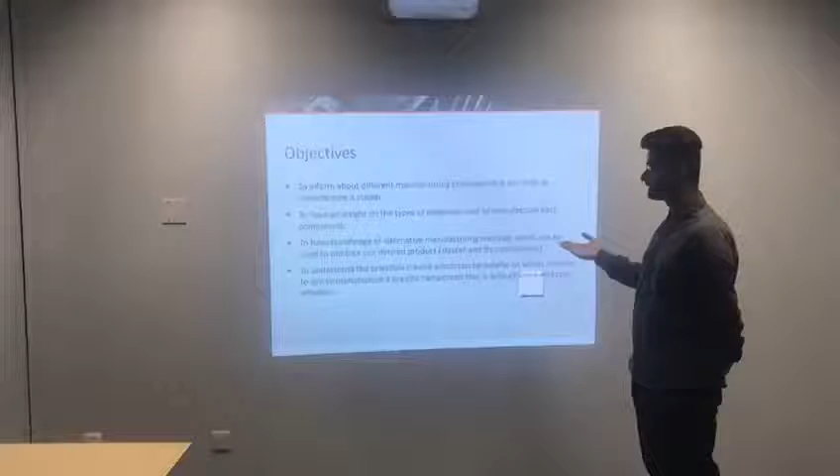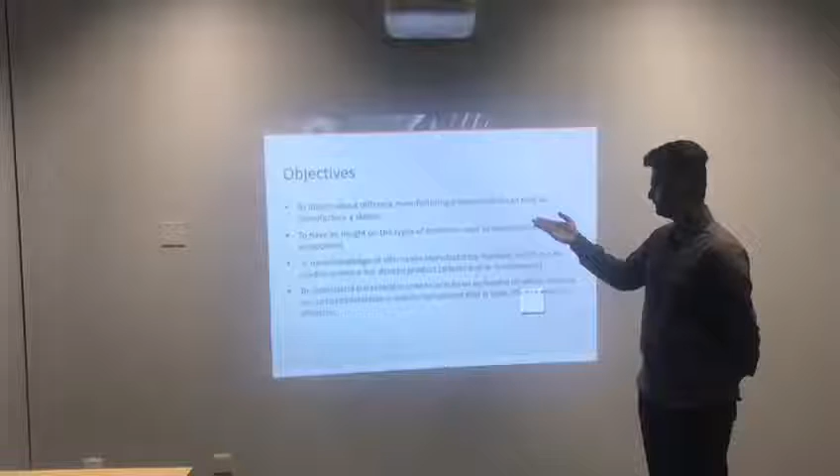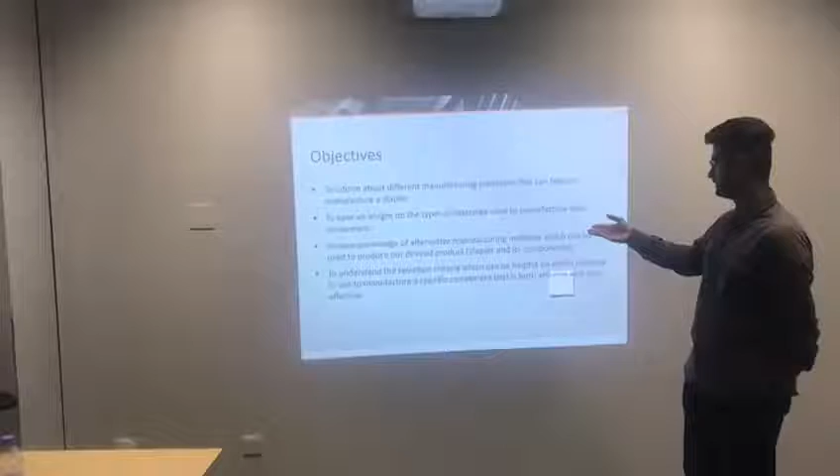The next slide is about objectives. Here we are here to inform about the different manufacturing processes that can help us manufacture a stapler. The second one is to have an insight of the types of material used to manufacture each component. The third one is to have knowledge of the alternative manufacturing processes, since the one which we are explaining is not the only one; there are different methods. The last one is to understand the selection criteria, which can be helpful on which material to use to manufacture a specific component that should be both efficient and cost effective.

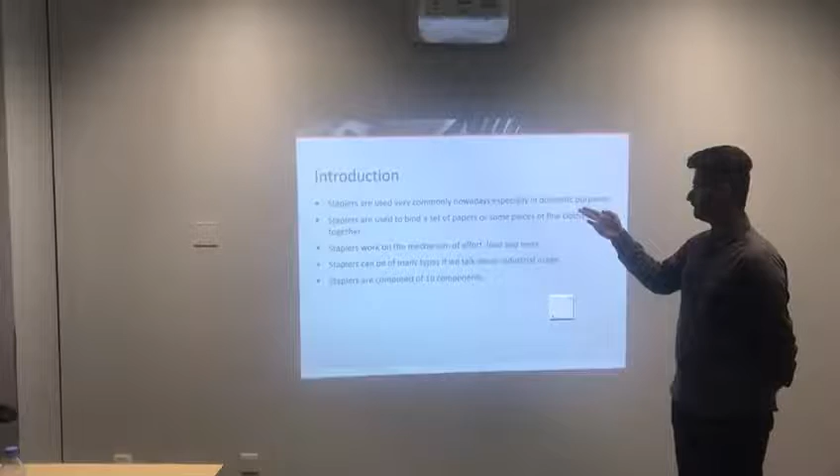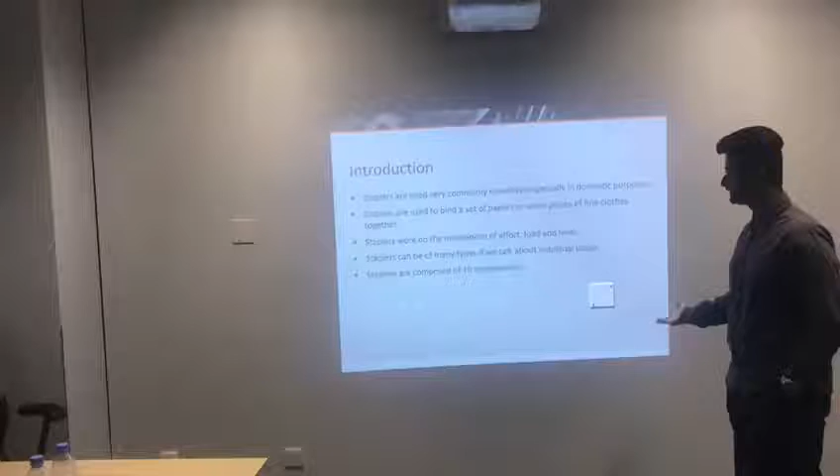In introduction, we all know that staplers are very commonly used nowadays, especially in domestic purposes. We have staplers which are used to bind a set of papers and some fine pieces of clothes together. Staplers work on the mechanism of effort, load, and lever: you have your base and the top part where you exert force, and the lower part on the edge of the base is where the load is given, with a fulcrum, like a pin on the end of the stapler. These staplers can be of many types; we can talk about it from the industrial usage also. The staplers are composed of 10 components, which my group mates will further continue and talk about.

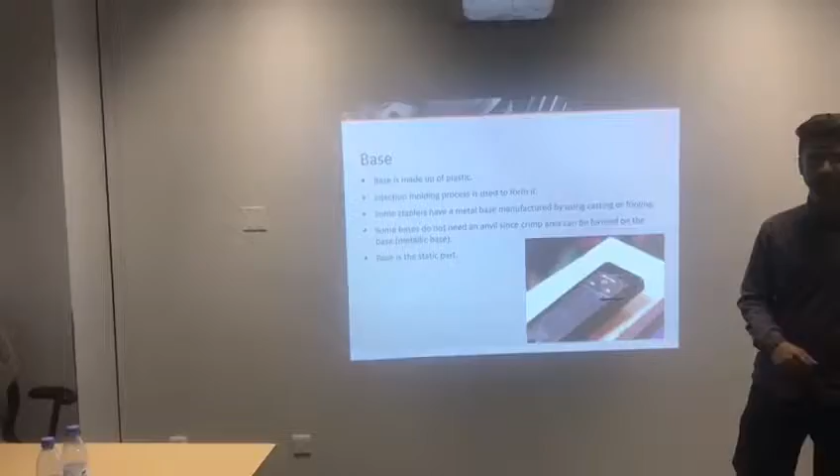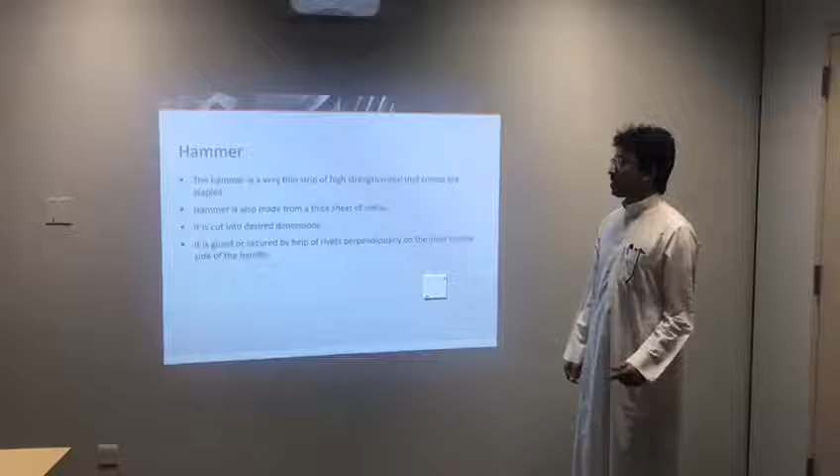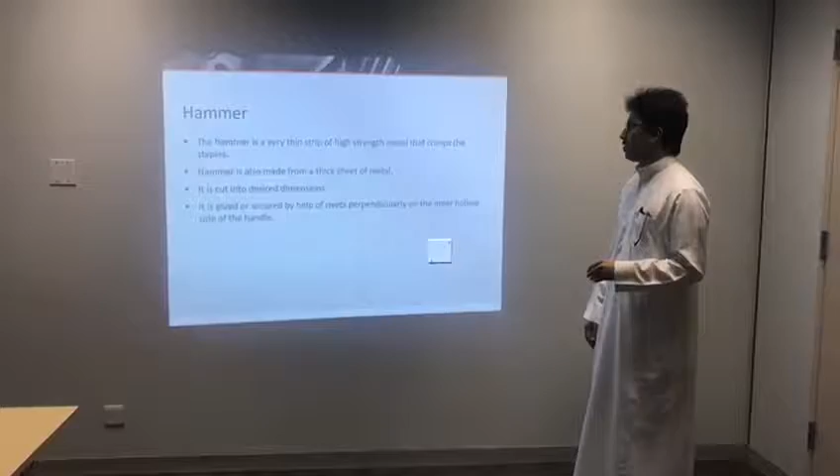Hello everyone, my name is Abdul Karim Al-Harbi. Hammer is a very thin strip of high strength metal that crimps the staples. Hammer is also made from a thick sheet of metal. It is cut into desired dimensions, and also glued or secured by help of rivets perpendicularly on the inner hollow side of the handle.

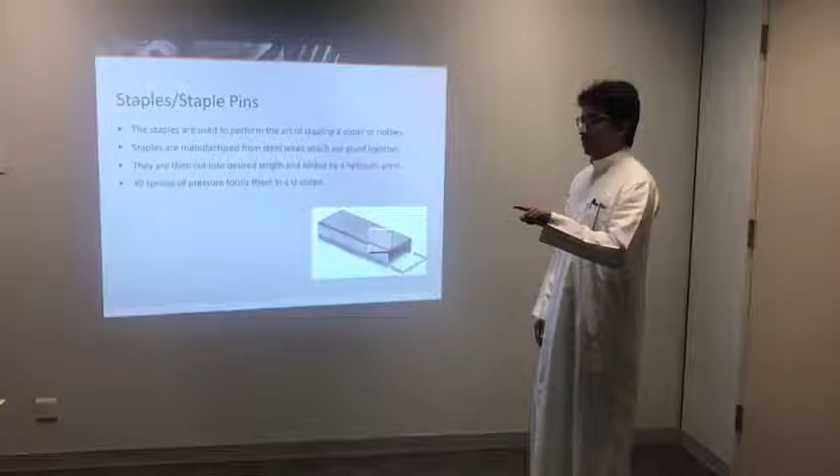The pusher is a small U-shaped part, slightly less thick than the thickness of the carrier raceway. It is used to push the stack of staples and keep them constrained to the crimping end of the staple. It is also made up of high-strength sheet metal or steel. It has a hook on one end to support the spring, and one end is flat to sit completely interfered with the staples.

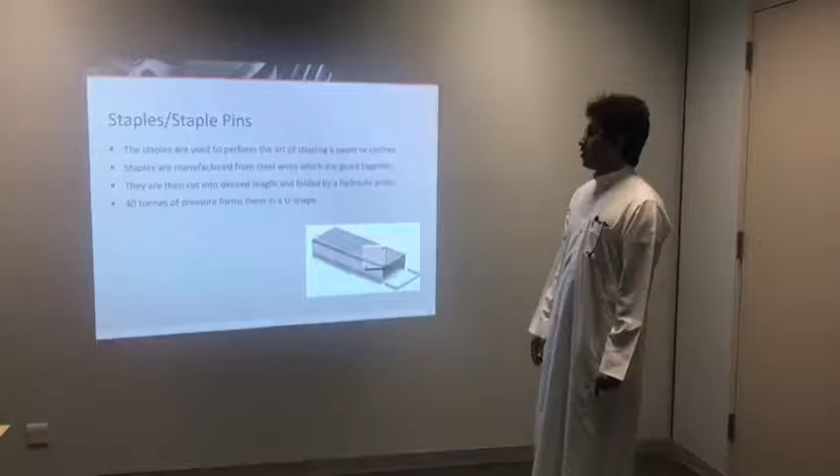Staples, or staple pins, are used to perform the art of stapling paper or clothes. Staples are manufactured from steel wires which are glued together. They are cut into desired length and folded by hydraulic press; 40 tons of pressure forms them in a U shape.

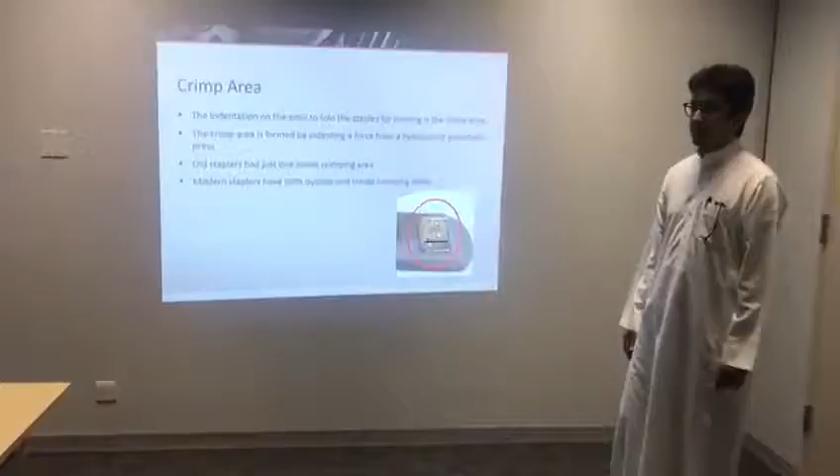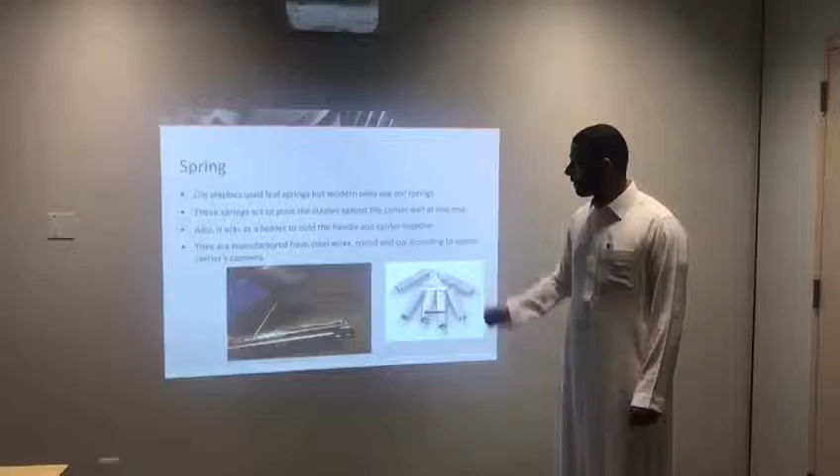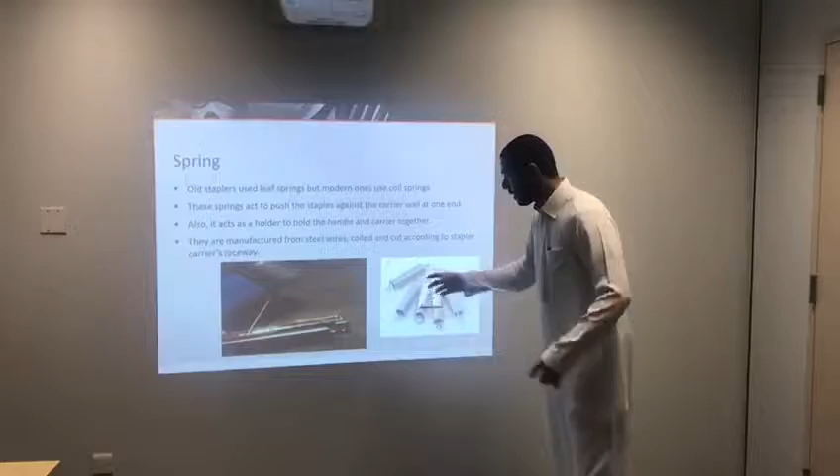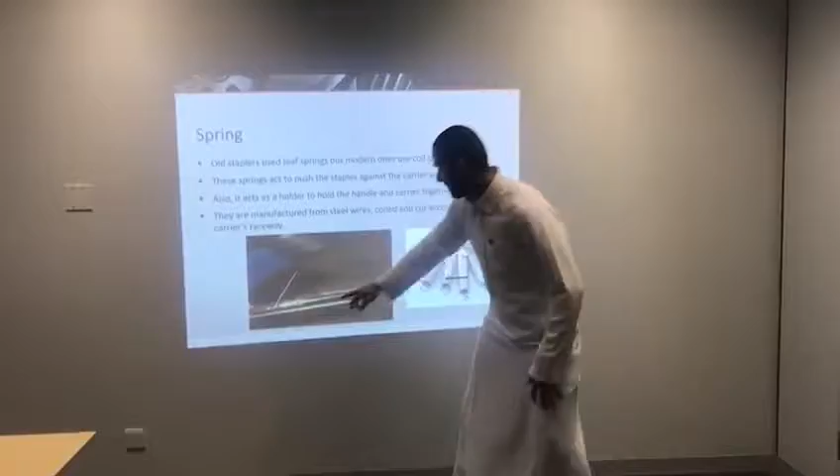Hello everyone, my name is Mohammed Al-Ruktan. I will talk about spring. Old staplers used leaf springs, but modern ones use coil springs, which is different. As you could see here, it could push the small anvil. What is this part? This here, where you go, this is pushing the pins, right? Okay, let's do it again.

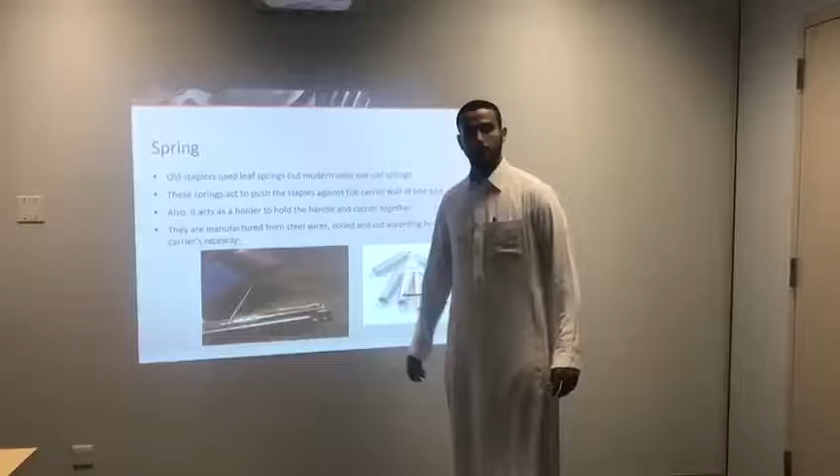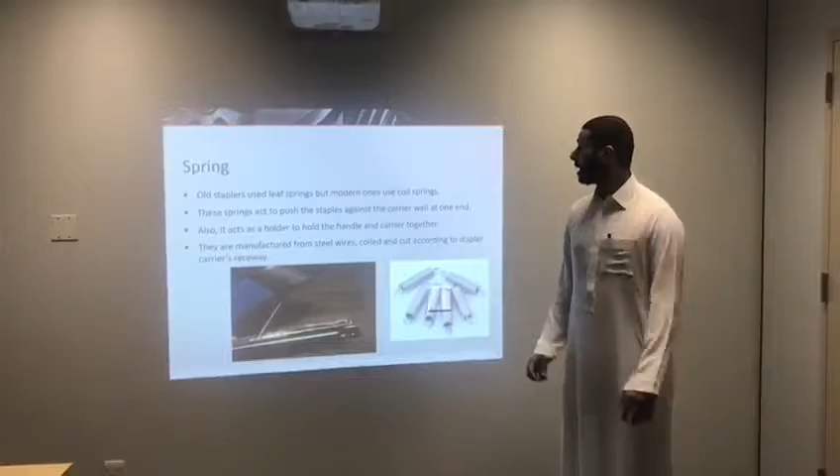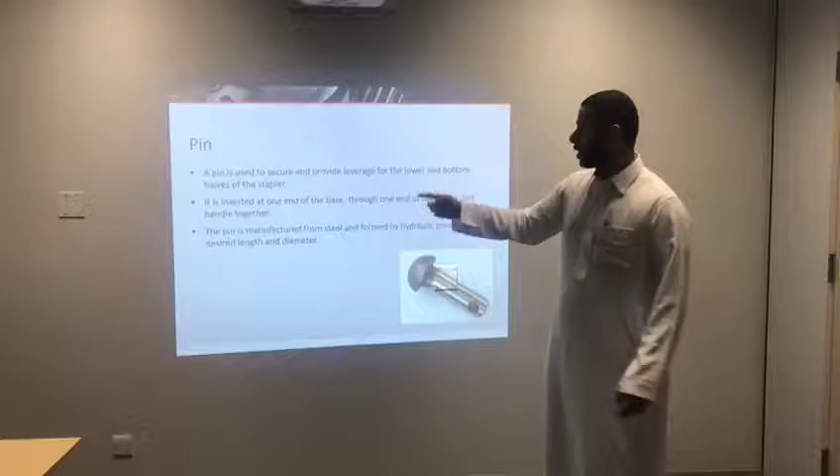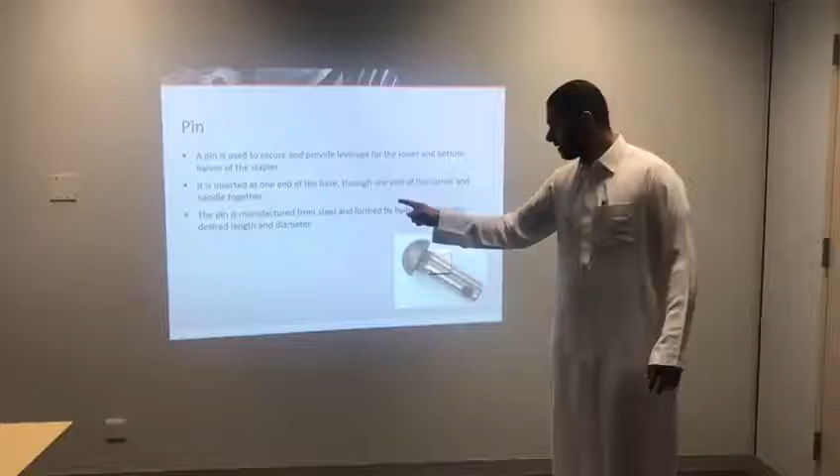Hello everyone, my name is Mohammed Al-Ruktan. Today I will talk about spring. Old staplers use leaf springs, but modern ones use coil springs. As you see here, these are the springs, pushing the pins here. These springs act to push the staples against the carrier wall at one end. Also, it acts as a holder to hold the handle and carrier together. They are manufactured from steel wires, coiled according to the stapler carrier's raceway. A pin is used to secure and provide leverage from the upper and bottom halves of the stapler. It is inserted at one end of the base through one end of the carrier and handle together. The pin is manufactured from steel and formed by hydraulic press into desired length and diameter.

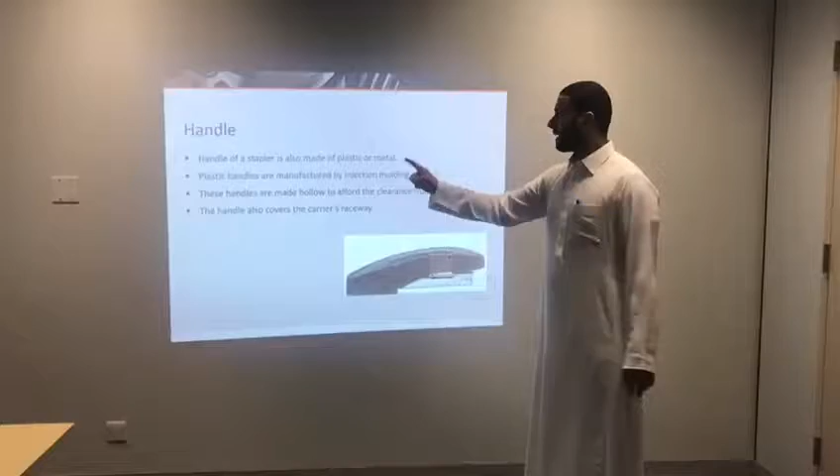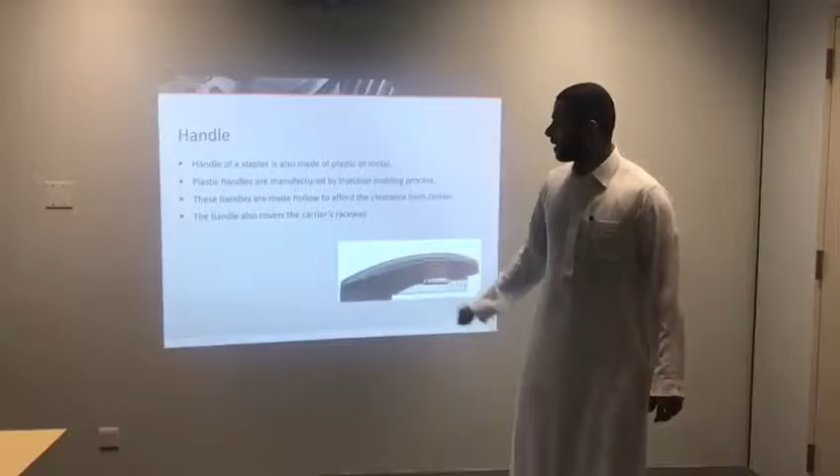Handle of a stapler is also made of plastic or metal. Plastic handles are manufactured by injection molding process. These handles are made hollow to afford clearance from the carrier. The handle also covers the carrier's raceway.

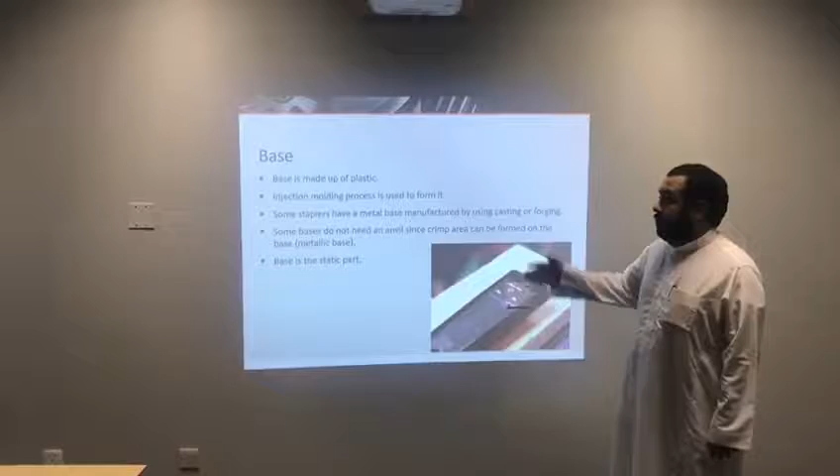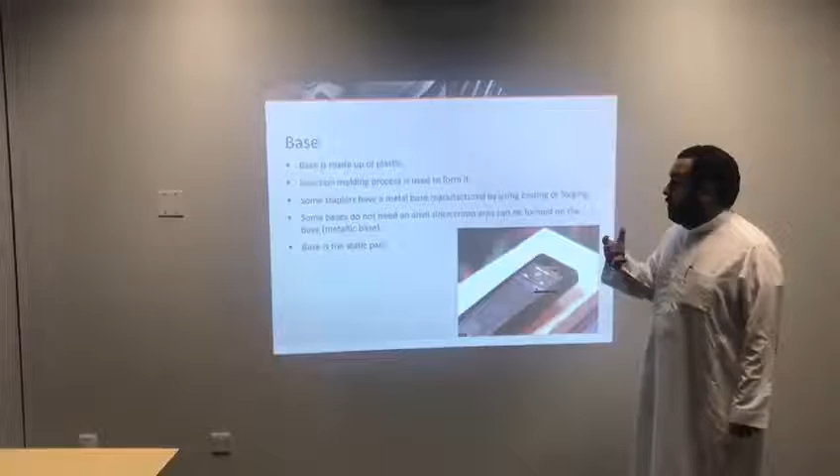Hi everyone, my name is Turki Ahmeri. I will talk about base. Base is made up of plastic. Injection molding process is used to form it. Some staplers have a metal base manufactured by using casting or forging. Some bases do not need an anvil, since the crimp area can be formed on the base. Base is the static part, like here; this part is the static one.

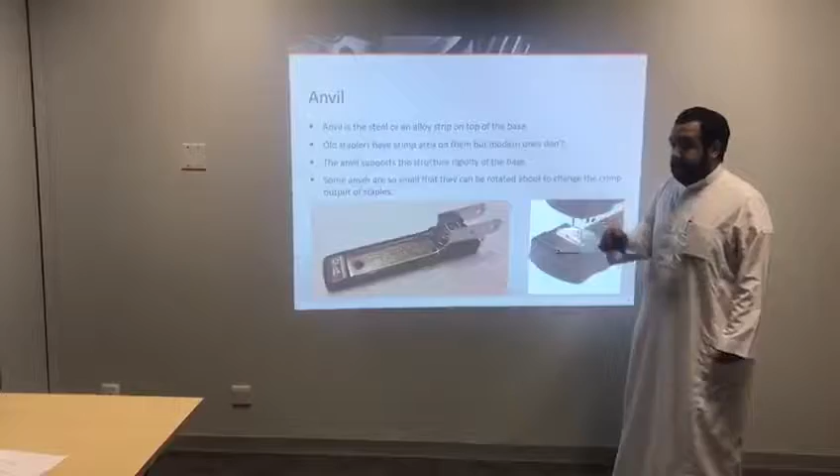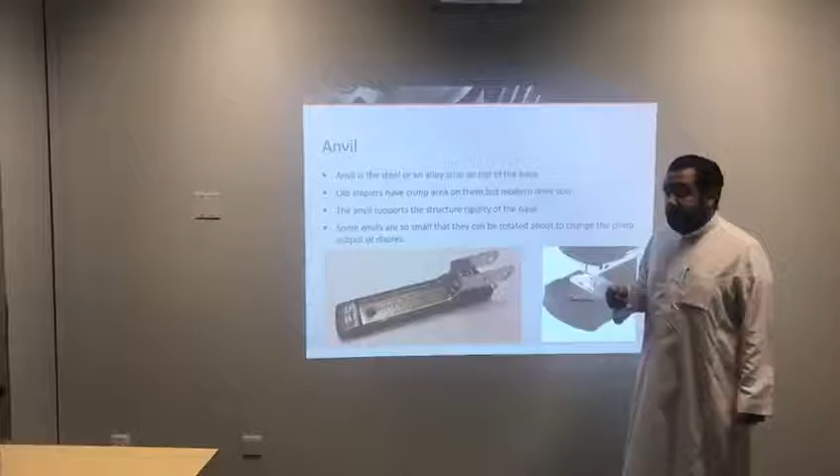Here is the anvil. Anvil is the steel or alloy strip on top of the base. Old staplers like this one have a crimp area on them, but modern ones don't. The anvil supports the structural rigidity of the base. Some anvils are so small that they can be rotated to change the crimp output of the staples.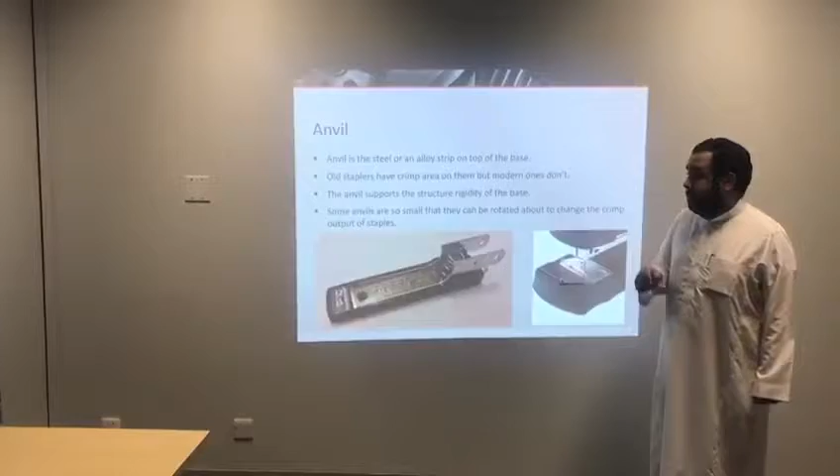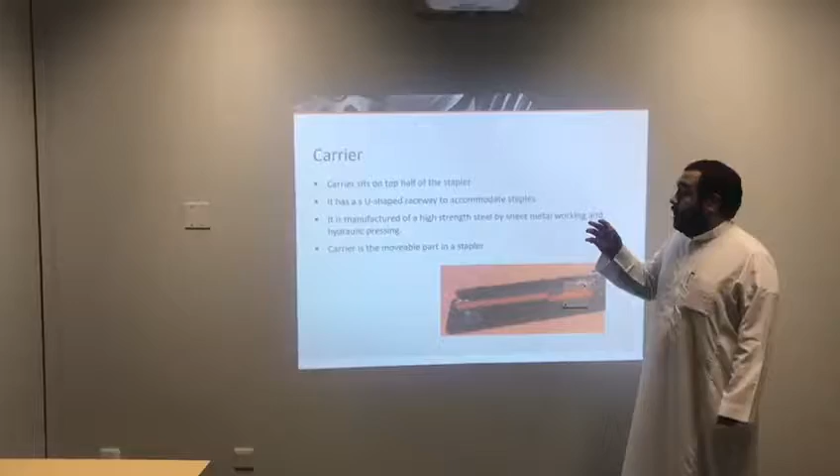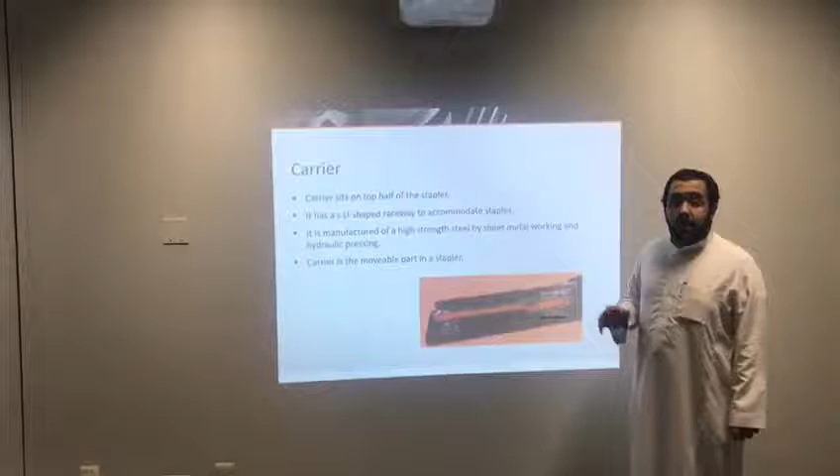Carrier sits on top half of the stapler. It has a U-shaped raceway to accommodate staples. It is manufactured from high strength steel by sheet metal working and hydraulic pressing. Carrier is the movable part in a stapler, like this part here, where the bin can be put inside.

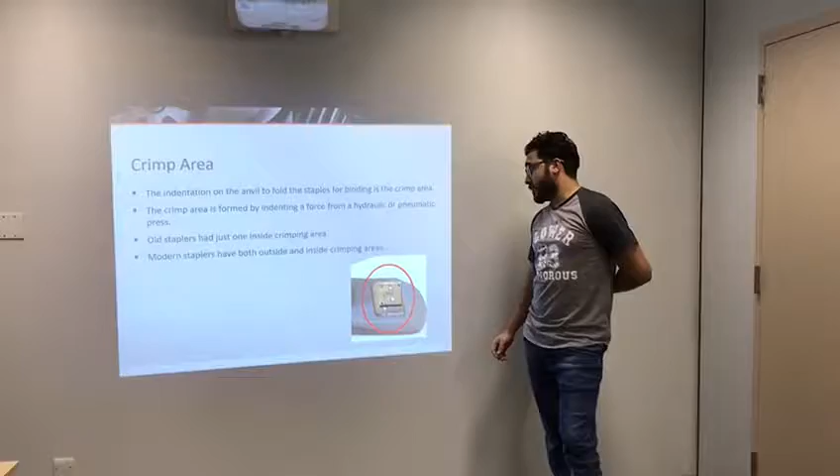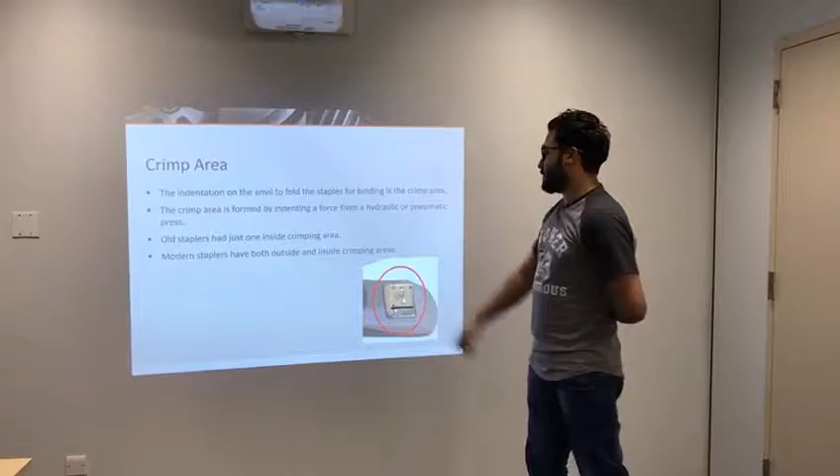Moving on to crimp area: the indentation on the anvil to fold the staples for binding is the crimp area. The crimp area is formed by indenting a force from a hydraulic or pneumatic press. Old staplers had just one inside crimp area. Modern staplers have both outside and inside crimp areas, like this one and this one.

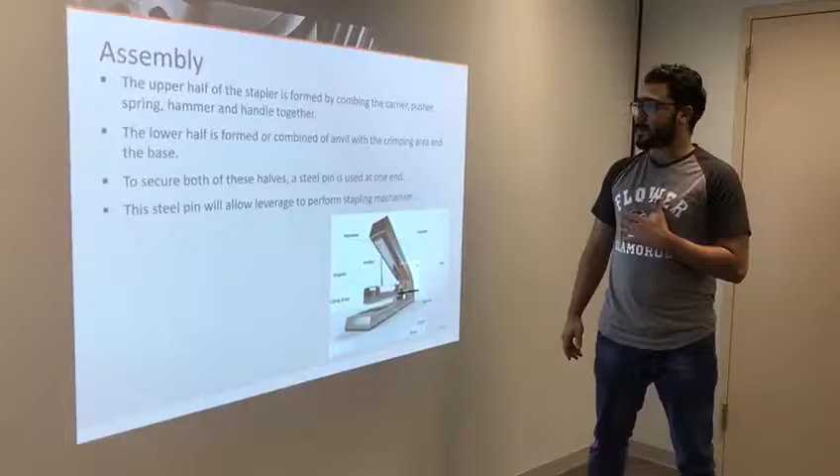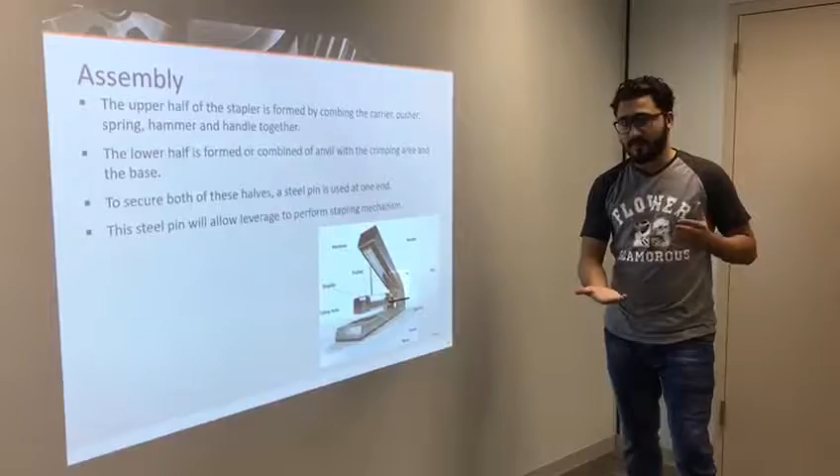Moving on to assembly: the upper half of the stapler is formed by combining the carrier, the pusher, spring, hammer, and handle together. The lower half is formed by combining the anvil with crimping area and the base. To secure both of these halves, a steel pin is used at one end, which allows leverage to perform the stapling mechanism.

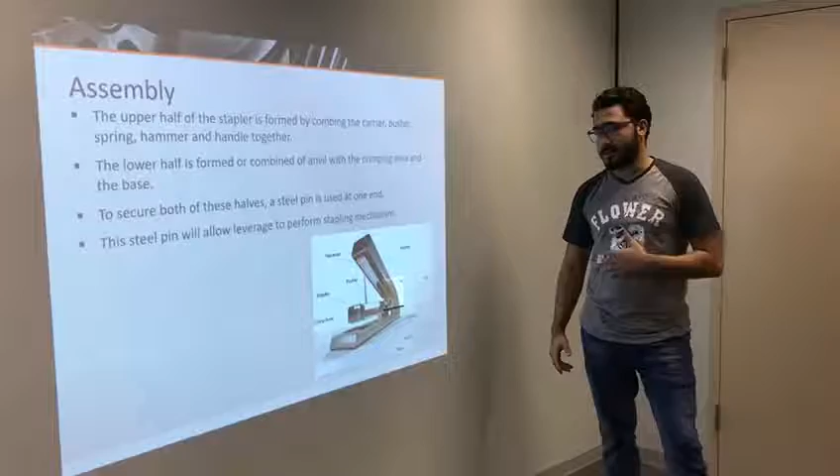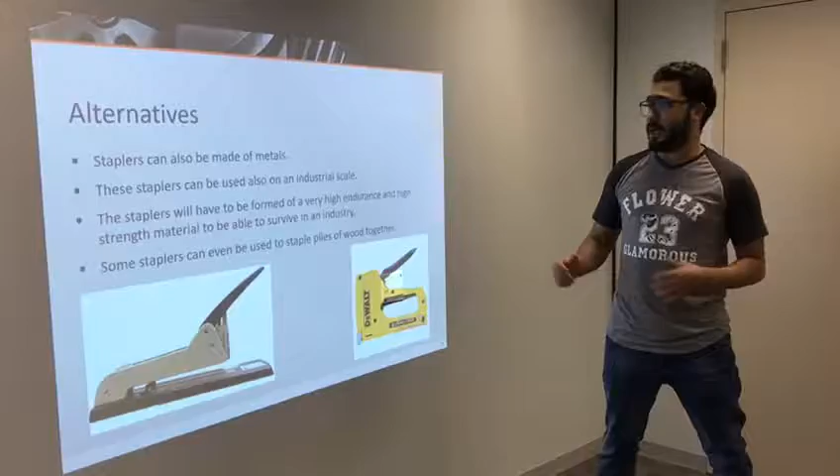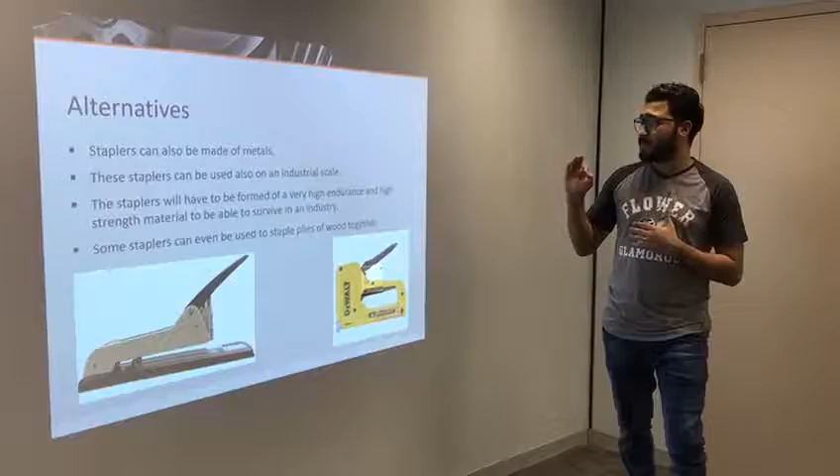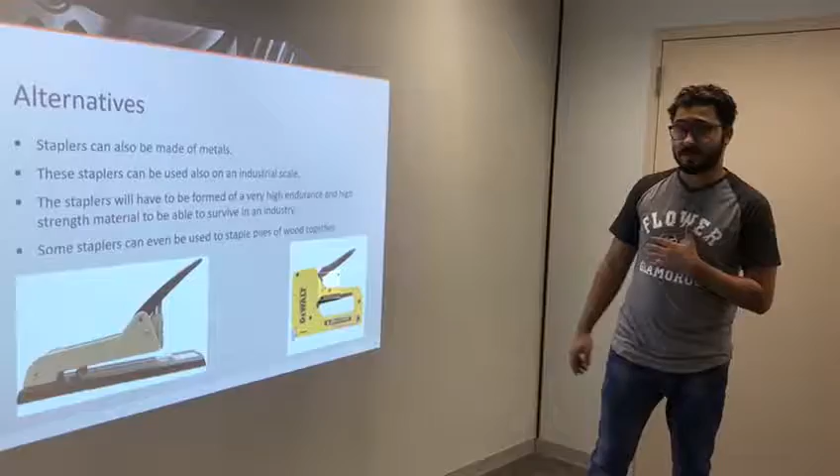We have some alternatives. Staplers can also be made of metals, and these can be used on an industrial scale. The staplers will have to be formed of a very high endurance and high strength material to survive in industry. Some staplers can even be used to staple piles of wood together; they have a very big stapler system, made of steel.